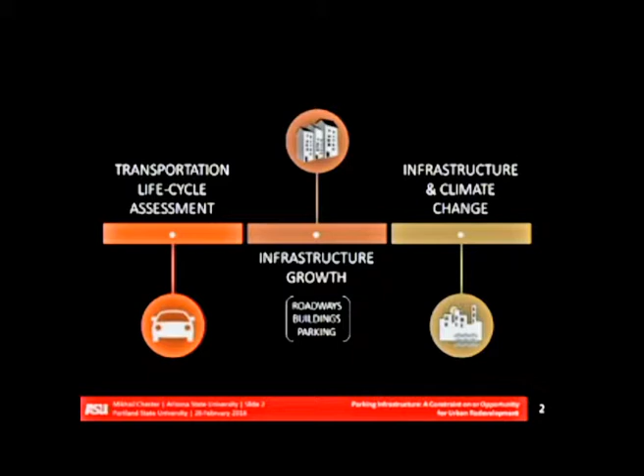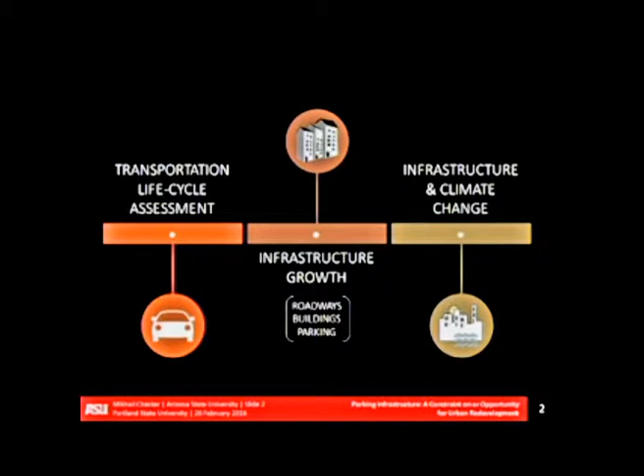I want to note, I'm not going to talk about this at all today - it requires its own hour at least. But this work is largely within what's called the Urban Resilience to Extreme Events Sustainability Research Network, UREx SRN. Three of these were awarded. The one on urban resilience to climate change is one I am co-leading with a number of your faculty, specifically Thad Miller and Vivek Shandas. There's ASU, Portland, as well as 15 other universities involved in that research effort. I'm happy to talk to you more about it after the seminar is over.

So let me try to walk you through how I get to studying parking, and then we'll talk for probably half of the lecture about the actual parking study, which is focused on Los Angeles. As a graduate student at Berkeley, starting in the mid-2000s, the field of life cycle assessment was really picking up.

Transportation folks were really adopting this framework to help them understand the environmental impacts of different decisions, emerging technologies, emerging fuels, and so on. Biofuels were a big deal then because we were subsidizing corn ethanol pretty heavily at the time.

Life cycle assessment became this sort of unifying framework by which we tried to assess transportation systems. So I come along as a graduate student, and my advisor says, life cycle assessment is great. We've been thinking about it in terms of this, this, and that. But one of the dimensions we haven't tackled at all is infrastructure. How does infrastructure contribute to environmental impacts within the life cycle of transportation systems? That became my PhD, and a lot of my postdoc work was focused on this question.

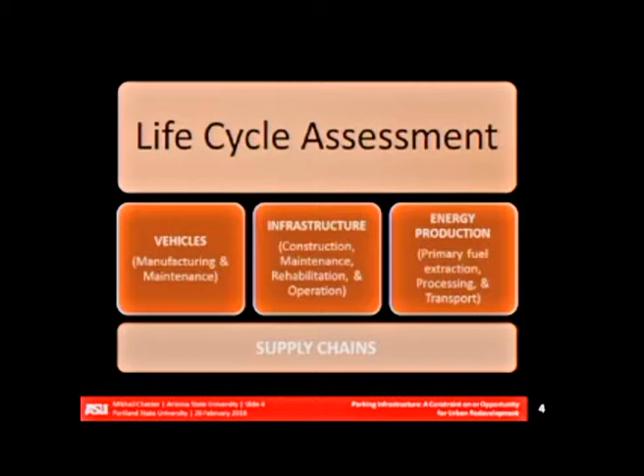For any one of these components, there could be dozens or even 50 to 100 different elements that all take in energy and produce environmental impacts. Not only that, they have supply chains. When you factor all of those things in together, you start to see a slightly different footprint for the environmental intensity of various transportation modes.

Here's some of the early life cycle work I did, the first study which came out in 2009. Anything that's gray is a tailpipe emission - that's what we had taken as the footprint up until then. A conventional gasoline sedan was emitting about 144 grams of CO2 per passenger kilometer traveled, with an average of something like 1.5 passengers per vehicle.

Anything that's blue is vehicle-related, manufacturing, maintenance. Anything red, orange, pinkish is infrastructure-related. Anything green is energy production - the idea that in order to get gasoline in your car's gas tank, upstream energy and environmental impacts are produced just to extract the fuel, refine it, transport it, and so forth. So colors are life cycle, and grays are the tailpipe.

Now you can see a car: that's 144 in the tailpipe, but when you factor in the life cycle, you get up to like 250-ish, 240-250. All of a sudden the life cycle gives you a slightly different picture of what might be going on. So it's important to think about it.

For some of these systems, the infrastructure processes are really big - see that, lots of red, orange, pink. For a rail system, for example, the infrastructure itself can make up half the life cycle footprint of that vehicle, which is a sort of commentary on the amount of infrastructure invested to move a certain amount of passenger kilometer travel by various modes. For rail, we have a lot of infrastructure, usually shorter distance travel, so the passenger kilometers traveled aren't all that high.

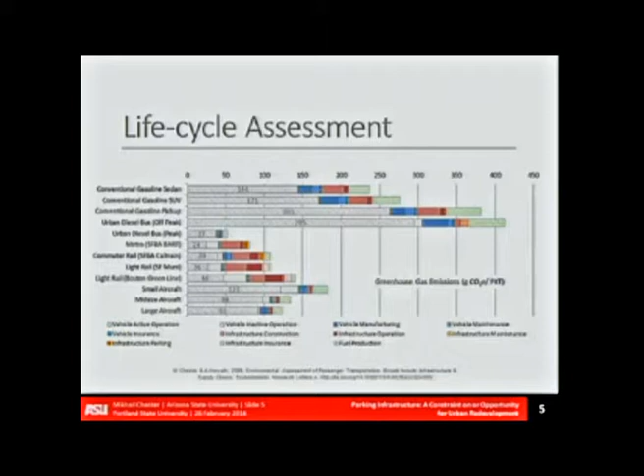He sent me this very polite email that said, I think you got parking totally wrong. So buried in here for a car should be parking, right? It should be roads, it should be parking. So I factored all that stuff in—I won't go into all the details, but parking is in there. So I get this email and he says, you used 105 million parking spaces across the U.S. for all passenger vehicles. He said, I think you totally underestimated it.

Does anybody want to agree or disagree? Why? Because there's far more parking spaces just in homes. Far more parking spaces in homes, okay? More than 100 million homes in this country. So there's over 100 million homes, and pretty much every single one of them has at least one parking space, right?

You could frame that differently—how many light-duty vehicles are there in the U.S.? 350 million? Why? Because we never stopped producing them. What's the population of the U.S.? It's somewhere around 310 to 320 million. And not all of those are drivers, right? So a large fraction do have a driver's license. We have more vehicles than we have registered drivers. So say there's 250, 300 million vehicles in the U.S.

At any given time, like my car right now—whenever I ask this question in Phoenix, everybody owns a car. I'm afraid to ask this in Portland, I think it might be the opposite. But for the most part, pretty much everybody in the U.S. owns a car, right? There's more registered vehicles than there are registered drivers. We know that for sure.

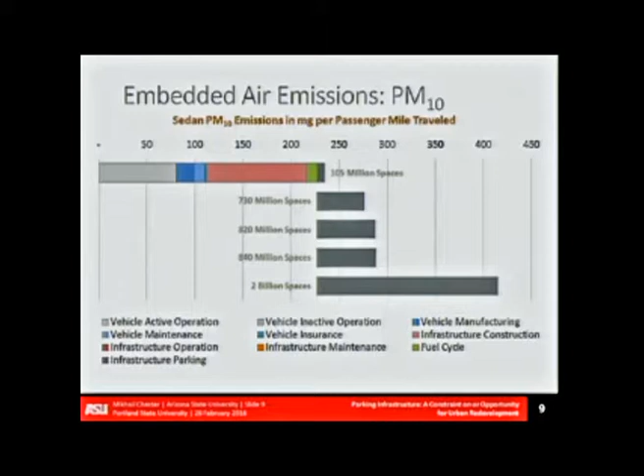We have a decent estimate of parking in the U.S., and we have a decent estimate of what the environmental impacts might be with these different scenarios. So that gave me a taste for parking. I came out of this and said to myself, all right, we have a decent estimate for the U.S., but we know nothing about cities.

As I started transitioning and looking at cities, I started saying to myself, we need a more rigorous understanding of where parking is in cities and why it grew to be what it is today. There were a series of studies I did over the past 3 or 4 years. I'll show you one on roads to give you a flavor of how infrastructure grows.

I would argue that as we get into things like urban sustainability, and we're talking about how we use that infrastructure, it's very difficult to define the trajectory of urban infrastructure without understanding the forces that made infrastructure into what it is today.

If you look out at the city around you and ask why does Portland look the way that it does, it's wildly complicated to figure out the answer. It's a result of not only technologies, but political forces, cultural forces, social forces, and economic forces that have come together over decades, if not centuries, to create the urban environment you see around you today.

So we said, let's look at Los Angeles. I'm going to focus on Los Angeles going forward for a couple of reasons. One, as I'll show you in a minute, the infrastructure of Los Angeles is mature. Los Angeles is a young city, but I'll give you evidence that the infrastructure has matured.

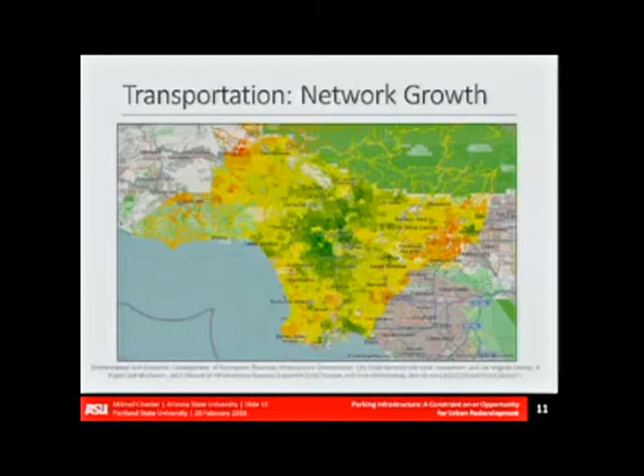So this is what I'm calling the maturation of infrastructure. Basically, at some point, we had put in as many roads as we could put in Los Angeles County, and at that point, we had shifted from a model of capital construction to a model of rehabilitation. That happens around 1990.

What we then did is we said, how much did all this cost, and how much will it cost going forward? We back calculated the capital construction costs and the maintenance costs. And what you see is a shift in the paradigm of financing, which you might suspect.

So early on, 74% of roads go in between 1930 and 1970. I think if you did this for Portland, you would probably see something similar. I don't know if the time periods would align, but you'd probably see this S-curve where Portland's, for the most part, built out. But what you see is capital investments, little on maintenance, because you have brand new infrastructure - that is Phoenix today. And then, all of a sudden, no more capital investments.

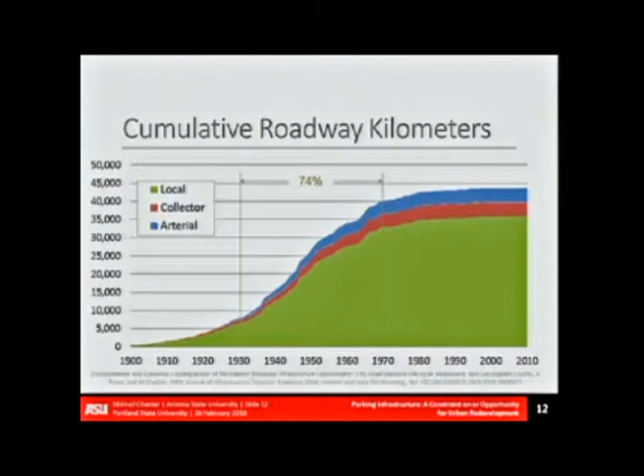So the infrastructure growth kind of brings us to the talk today. I'm going to give you a sense of how we modeled the growth of infrastructure, parking infrastructure in Los Angeles. Then I'll talk about the implications of it, what I think it means.

This was a project that I did with my graduate student, with a colleague at University of California, Los Angeles, Juan Matute, Ram Pendyala, who was a professor at ASU in civil engineering. He's now at Georgia Tech, but ASU is so awesome that he's coming back. And Carolyn Flower, who was an undergraduate researcher with us, who was at Dickinson College. So the five of us worked on this study. It's not all my work. I'm going to give credit where credit is due.

The study is published in the Journal of American Planning Association, which is not a place that engineers usually publish, but it was the right place for me to publish. The editors voted it the #2 JAPA paper of 2015, so I'm kind of happy about that. It was a grueling process. I had to rewrite it 4 times at the request of the head editor, but it came out to be a great paper.

There are a number of categories of parking that you have to model when you're thinking about the historical growth of parking. So there's residential off-street, there's non-residential off-street, and then there's on-street parking. Those are the big 3. And you have to sort of model them in different ways.

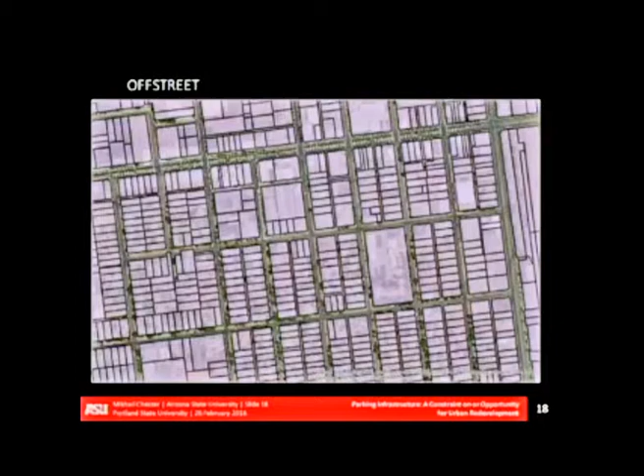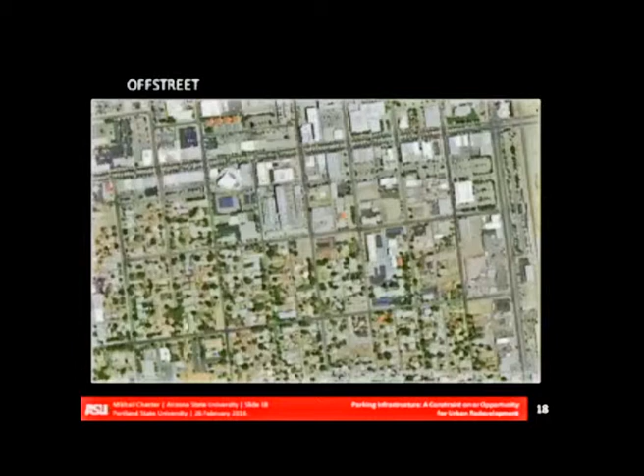For example, with residential or non-residential off-street, what we did is we took the assessor databases, we looked at the building use codes, and we said, based on the use codes, let's look up the minimum off-street parking requirements historically. Based on some building growth and turnover modeling that we had done for Los Angeles, we were actually able to know how many buildings, or certain types of buildings, existed in certain areas of the city at certain times.

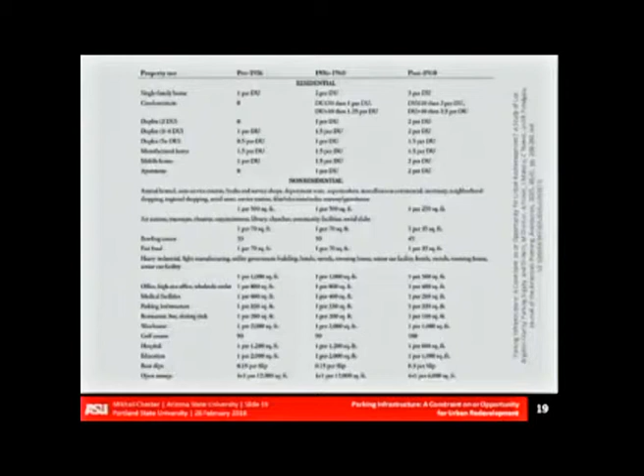And we aligned that with historical minimum parking requirements for different use codes of land use. Make sense? So there was a regime of parking requirements that existed until about 1936. That shifts - 1936 to 1960, you have a different regime of parking requirements. And then that shifts again post-1960.

So we dug all this stuff up. A lot of people had kind of looked at this in the past, and we were able to piggyback off of them. But we dug all this stuff up, and we were able to apply these estimates, like 1 space per 400 square foot for a medical facility constructed pre-1936. So this allows us to estimate the number of off-street parking spaces historically through today.

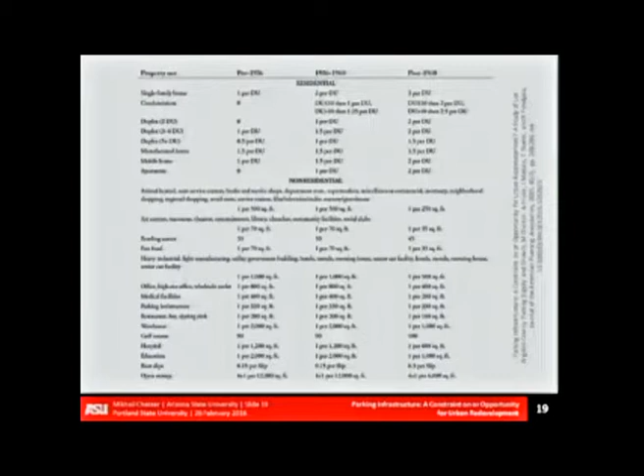On-street parking isn't so simple when you get down to brass tacks. It's basically the shoulders of roads, and in the urban core of the city, most of that shoulder is used for parking. However, there are buffers at intersections where you can't park within so many feet, and there are fire hydrants, bus stops, and driveways.

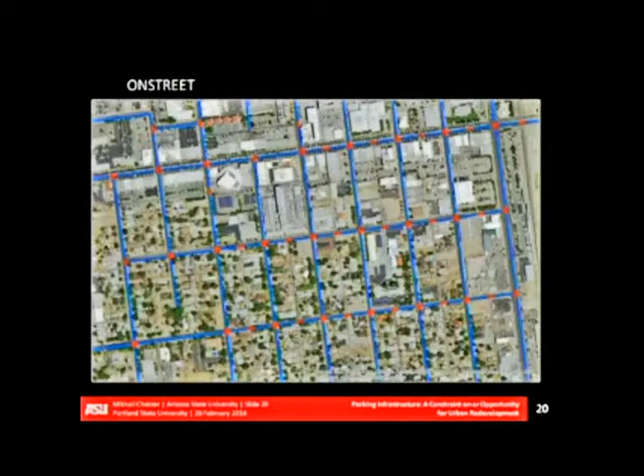That was a beast of a GIS analysis done by one of my graduate students. This gives you a sense of the red areas of road that were taken out for various reasons, using layers of fire hydrants, bus stations, and bus stops. We also had to account for driveways, which wasn't easy either since the width of driveways changes over time. So we did our best guess, and that's how we got the on-street estimate.

For surface lots and structures, some of this can come from the assessor database, but assessor databases are really bad at comprehensively coding parking structures and lots. Basically, what you'll get are garages, multi-story structures, and surface lots whose parcel is dedicated to that land use. But when you have facilities not dedicated to parking, like a building with a parking lot, it doesn't get tagged as such in the assessor database. That's the majority of actual parking structures.

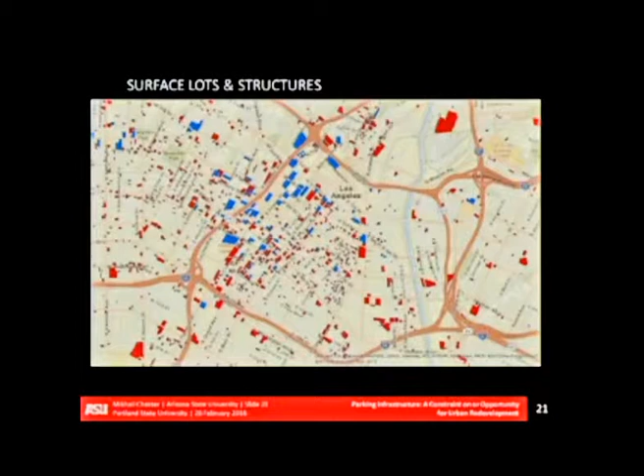So we did a few things. One, we mined what's called the ParkMe database, a crowdsourced database for Los Angeles where you can see live parking availability and parking prices—it's a cool website. We mined this and used it as validation against the assessor databases and against the minimum off-street requirements from the previous part of the study.

Does everybody know the history of minimum off-street spaces? Probably not, though planners have been exposed to it somewhat. In the 20s and 30s, the dominant technology of the time becomes the automobile in terms of mobility. It takes off, becomes cheaper, the technology matures, and people start adopting it. Dominant technology and infrastructure are very highly interrelated—it's important not to separate those two things.

So people are using cars, but there are no off-street parking spaces. Can we even fathom what this is like? We can't really imagine urban form like this for the most part. So where do you park cars? On the street. And what does that do? It creates congestion because it creates a bottleneck, slowing down other cars from driving through. Now that's a desirable thing today, but back then, in the 20s and 30s, it was not desirable.

Not only that, cities weren't designed for cars. Cities had short blocks, and the roadway widths weren't designed for fast thoroughfares of automobiles. So we start redesigning things in the code, and in many cities across the U.S., we started instituting minimum off-street parking requirements. There's a list of reasons—I'm not an expert on this topic, but here are the punchlines.

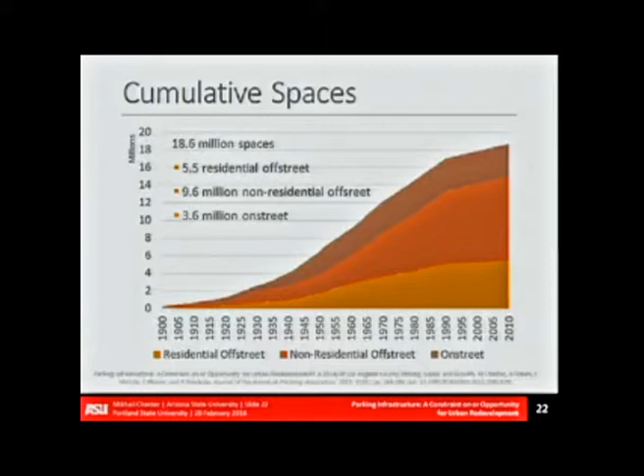We published a study and it got some press. It's amazing what people focus on. I thought what was unique about this study was that we were capturing the growth of parking. What everybody else thought was interesting was that we said 14% of Los Angeles's incorporated area is covered with parking. Somebody even did a big circle in Google Maps to represent that land area, which isn't wholly accurate because you have multi-story parking structures.

That's more land area for parking than for the traveled roadways, which is consistent with the study I showed you for the United States. So this is what I was getting at before, the importance of understanding infrastructure. There's more asphalt infrastructure for parking than there is for roads, and we often have no idea how much of it is out there.

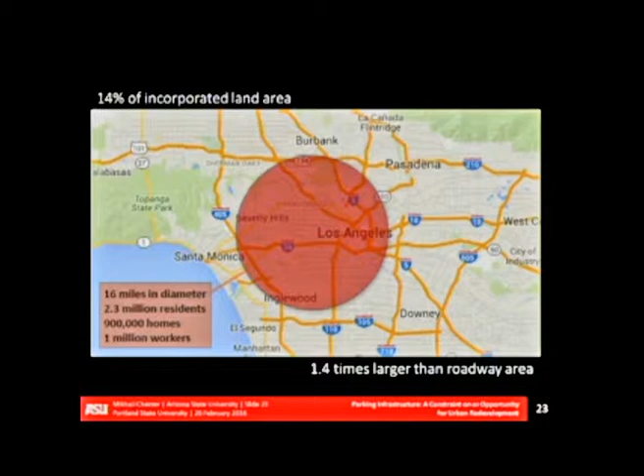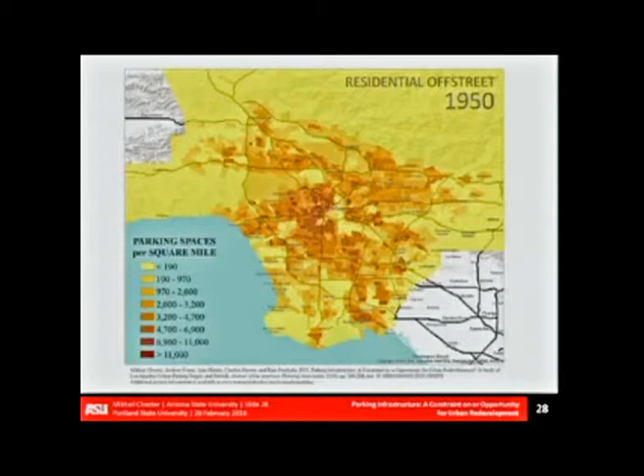1950, 1970 — this is residential off-street — 1990, and 2010. It's going to keep looping through. So this is residential off-street spaces per square mile. You can see in 1950, it was concentrated in the urban core, greatest density, and then you see an evening out as parking expands outwards. Currently, there's about 5,000 residential off-street spaces per census block, on average, in LA. About 11,000 total spaces per census block.

A lot of parking, okay?

To tie this up, minimum parking standards have been a success at encouraging automobility and probably a failure at lowering congestion. We didn't directly do this analysis, but the evidence supports this statement going forward. Before 1975, you had more residential off-street parking than you had vehicles. People adopted fast to make up for that, and by 1975 the growth in the number of vehicles is about equal to the growth in the number of residential off-street parking spaces. This has hovered around unity for a while.

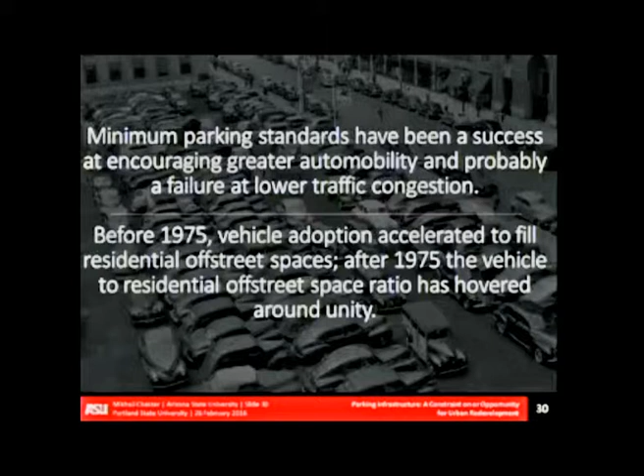One of the other interesting things we see is that when you take parking spaces away from regions, vehicles tend to disappear — either people get rid of their cars or move to neighborhoods where there's more parking — and vice versa, when you add more residential off-street spaces, vehicles tend to grow. We found that in 74% of census tracts in Los Angeles there was what we call a convergence, meaning the number of vehicles would move towards the number of spaces.

Even if minimum parking requirements are reformed, you're going to have to work against a century of putting in this existing parking infrastructure. A lot of minimum parking reform efforts are focused on new parking, and that's great, but there needs to be efforts focused on the existing infrastructure as well.

What we found in Los Angeles is where the greatest density of parking exists, in this urban core downtown area, is also the place where new transit initiatives are concentrated and where population growth is mostly forecast. The abundance of parking in that area is likely to work against transit adoption, getting people out of cars, and reducing congestion in those areas.

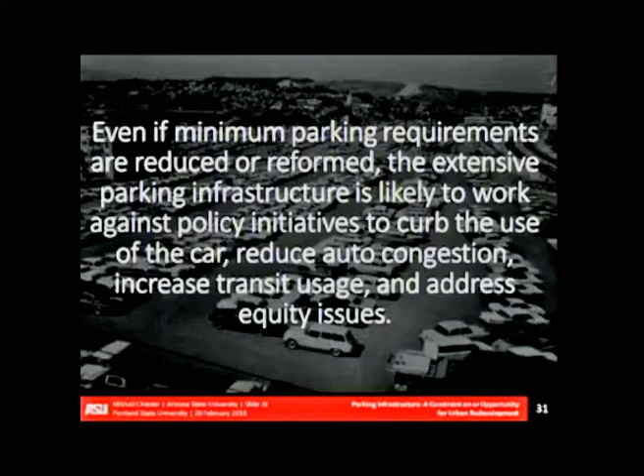I mentioned this already. Transitioning parking — to me there's a bunch of things we need to think about. I'm not a parking policy expert, I'm sure there are people in the room who are. But converting existing infrastructure to housing, commercial, industrial, even recreational space is critical. You have to undo this existing infrastructure, take it over, and do something else with it, including replacing surface lots with buildings.